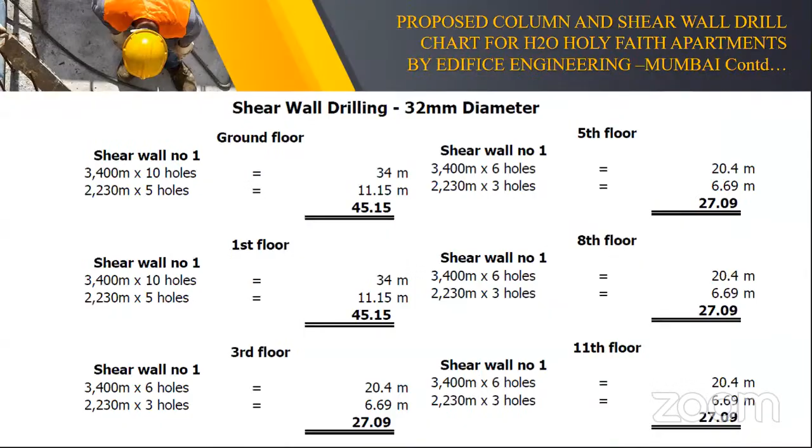So we are presenting a case study, the demolition of apartments at Maradu, Kochi, as part of this presentation. Let me run through, as the time is a bit short.

Demolition can be defined as dismantling, razing, destroying, or wrecking any building or structure or any part thereof in a pre-planned and controlled manner. Whenever a structure is to be demolished, it must be seen that the method adopted takes minimum duration, produces less noise, causes no pollution beyond permissible limits, does not disturb the activity or living in the neighborhood, and is economically viable.

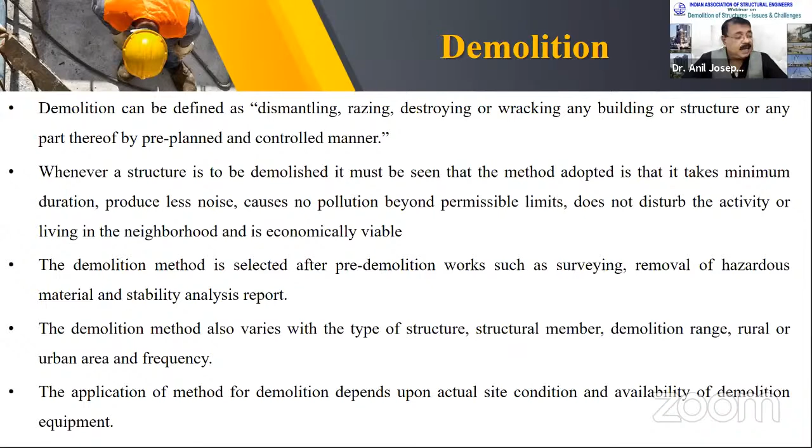The demolition method is selected after pre-demolition works such as surveying, removal of hazardous material, and stability analysis reports. Demolition method also varies with the type of structure, structural member, demolition range, rural or urban area, and frequency. The application of method for demolition depends upon actual site condition and availability of demolition equipment.

So there are principally three types of structure demolition. One is progressive demolition, second is the mechanism of controlled demolition, and third is the top-down system.

The heavy machinery or equipment includes large motorized vehicles such as bulldozers with rakes, backhoes, hydraulic excavators, and other similar machinery. Cranes equipped with wrecking ball, clamshell, or bucket are also considered heavy machinery.

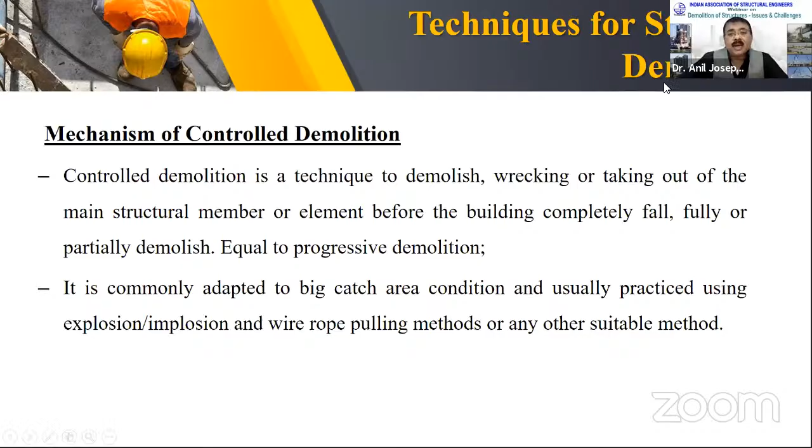In the mechanism of controlled demolition, it's a technique to demolish by wrecking or taking out the main structural member or element before the building completely falls, fully or partially demolished, similar to progressive demolition. It is commonly adopted for big catch area conditions and usually practiced using explosion or implosion and wire rope pulling methods or any other suitable methods.

Deconstruction or top-down method is the technique that proceeds from the roof to ground in a general trend. There is a particular sequence of demolition which may vary depending on site condition and structural elements to be demolished. It is the process of dismantling a building in order to salvage the structural members for material reuse and recovery, commonly practiced using machinery and hand demolition methods. Top-down method is applicable for most sites, particularly for those situated in busy urban areas.

And coming to our topic of discussion today, demolition of buildings by implosion. Implosion or explosive deconstruction is an effective and efficient method of deconstruction and can reduce both cost and time to bring dangerous multi-story structures to ground in comparison to conventional demolition methods.

Implosion is the strategic placing of explosive material and timing of its detonation so that a structure collapses on itself in a matter of seconds, minimizing the physical damages to its immediate surroundings. The technique weakens or removes critical supports so that the building can no longer withstand the force of gravity and it falls under its own weight.

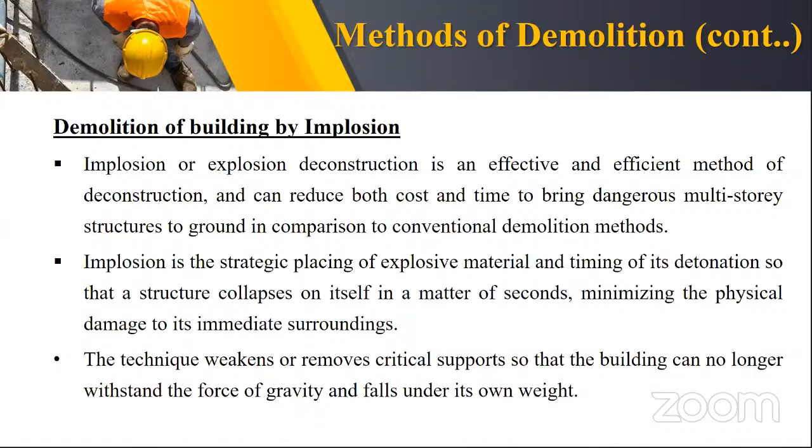So before we go for the blast, there are many considerations which we have to look into. The design may include pre-weakening of the structure, the strategy in placement of the explosive, and time delay so that the building will collapse in a safe manner.

The pre-weakening of the structure may include cutting out a portion of the shear walls and other structural elements, removing the non-load bearing walls. A test blast may be conducted to verify the strength of the structural member and to fine-tune the explosive design.

To minimize the dispersion of building debris into adjoining land after implosion, a trench or bund wall shall be installed outside the building to contain the debris unless a basement exists. After filling the explosive, it will be covered with geotextile wrapping and iron mesh wrapping to prevent flying debris from going out and creating havoc. So this is a good design that will cause the structure to fall towards the center of the building.

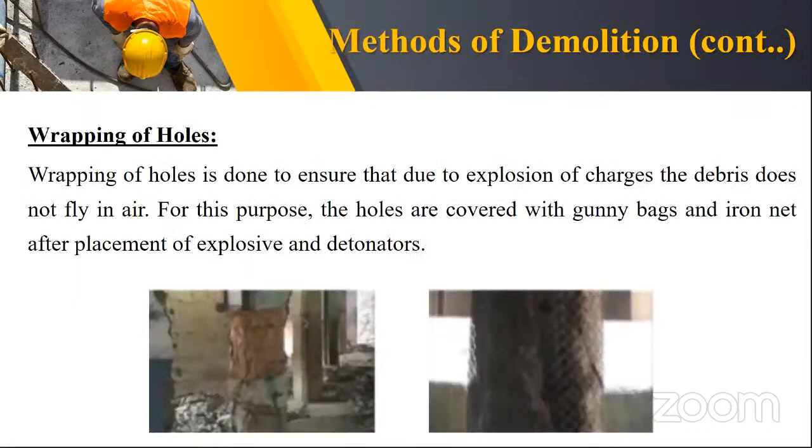Finally, we will go for blasting with the time sequencing so that the building falls in a gradual and planned manner, and the collapse is controlled in such a way that it comes down without affecting the surrounding buildings. So this is the picture presentation of what I talked about now: the conventional top-down method, the wrecking ball method, the hydraulic crusher.

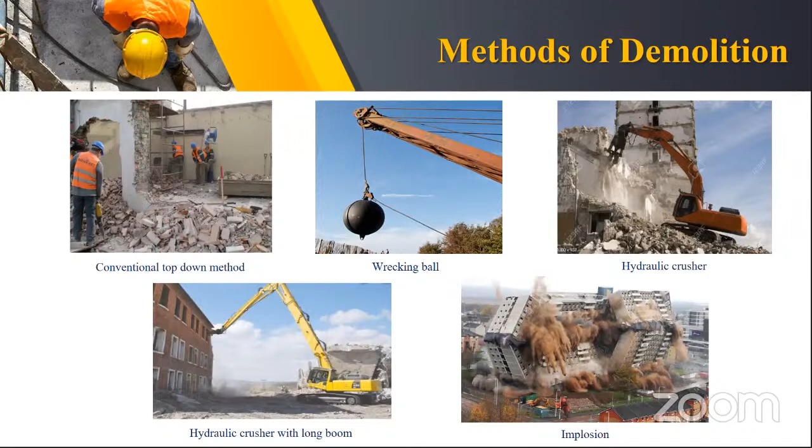Now looking into this, what we do in implosion: use of explosives, protection from noise, debris, and vibration. You need qualified blast heads, good engineering skill between structural engineers, mining engineers, electrical engineers, electronic engineers, and the fire and safety department, and the neighborhood.

So now moving on to the case study for the apartment at Maradu. Maradu is just 7 kilometers from Kochi, and it was formed in '53, and was upgraded to a municipality in 2011.

On September 19, 2006, the Panchayat, without obtaining the mandatory permission from the Kerala Coastal Zone Management Authority, issued building permits to the builders. So builders started constructing the building, and the piling works was carried out.

The building was coming up, and suddenly the Coastal Zone Management Authorities realized that this was not legal, that permission was not obtained. They went and put a stay on the building. But owners approached the court, and the court gave them permission to continue.

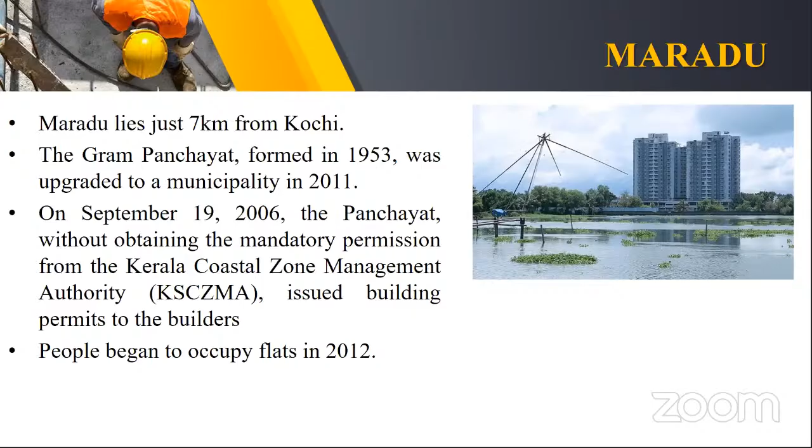And this is the court order: the Supreme Court order on May 8, 2019, when Justice Arun Mishra and Navin Sinha said the permission granted by the Panchayat was illegal and void, and no such development activity could have taken place. In view of the findings of the inquiry committee, let all the structures be removed forthwith within a period of 1 month from May 8, 2019, and compliance be reported to court.

On September 6th, the Supreme Court issued another direction that the state government demolish the apartment before 12th February 2020, and remove all the debris and clear the site.

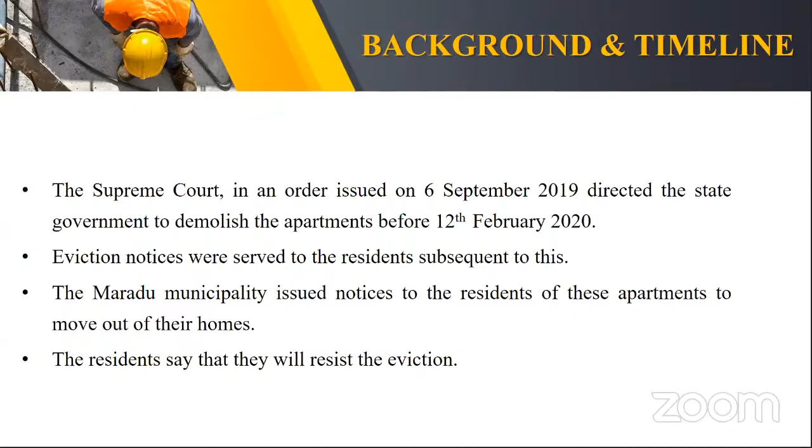So eviction notice was served to the residents subsequent to this. The municipality issued notices to the residents of this apartment to move out of their homes. Residents say that they will resist the eviction, and you can see that the Supreme Court verdict came as a rude shock to the residents.

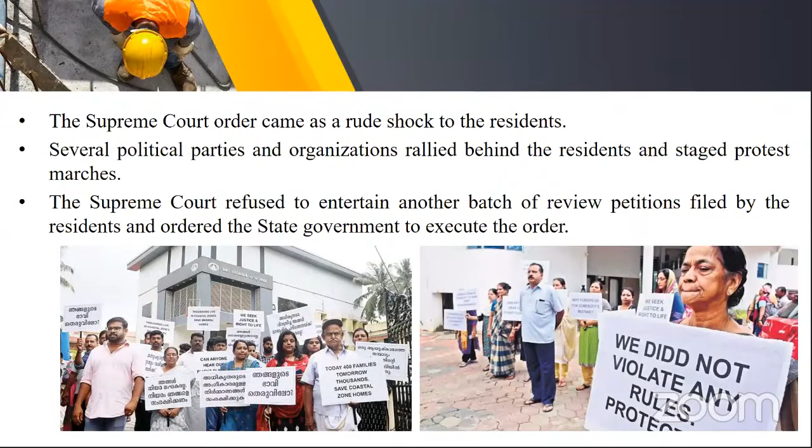Several political parties and organizations rallied behind the residents, and there was a lot of protest. The Supreme Court refused to entertain another batch of review petitions. In fact, there were 17 review petitions filed after I was appointed as the structural engineer to support the government in bringing down the buildings. All 17 appeals were refused by the Supreme Court, and the state government proceeded to execute the work order. So this shows the people who were staying in their homes, in their houses.

Demolition is cruelty to mankind, and they are protesting against the demolition activity of the government. And again, you can see that this was a long-term process. To inform the audience, I was the structural engineer who designed all these buildings other than one, the small building. All the 4 other towers were designed by me as a structural engineer in the year 2006, and the buildings were constructed under my guidance.

Unfortunately, this role was so vague, nobody had a clear-cut idea. And finally, since it was surrounded by so many buildings and the government put so much pressure on me, I had to take up the responsibility for getting the building down also. So I had the dual role of Brahma, the creator, and Shiva, the destructor, in this particular project. And it is quite an emotional thing.

In October, I was still not part of the government team, and I shared my apprehension in the local news channels about the demolition of Maradu flats and raised concern about the safety of the neighborhood. Representing the Association of Structural and Geotechnical Consultants, we had a couple of rounds of meetings with the collector and other office bearers, including the principal secretary. A government order was released appointing me as a member of the technical committee for demolition, representing the Association of Structural and Geotechnical Consultants.

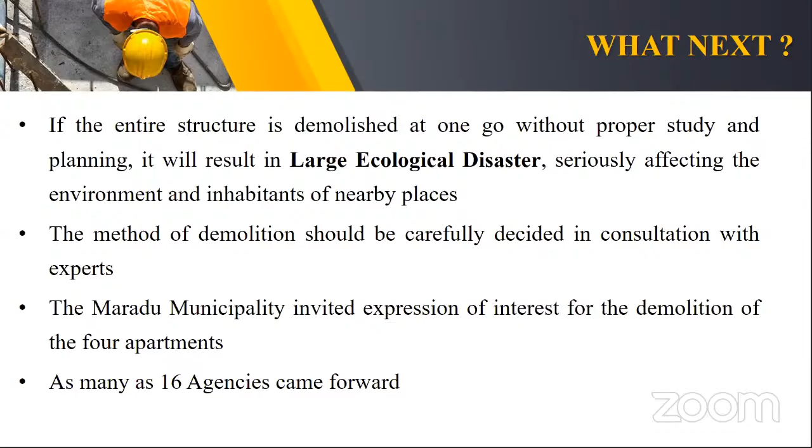We invited expressions of interest for demolition of the 4 apartments, because demolition by implosion was the only practical solution due to the time frame, and 16 agencies came forward. A lot of discussion and deliberation happened, a lot of reviews were conducted, and finally we decided to zero in on Edifice Engineering Mumbai and Vijay Steel from Chennai. And Edifice gave the work to Jet Demolition from South Africa to do the job.

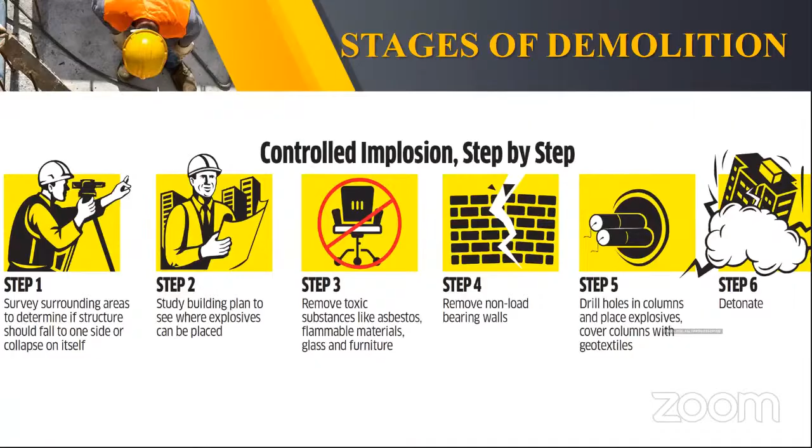The steps for controlled demolition, put in a simple manner: step 1, survey the surrounding area to determine if the structure should fall on one side or collapse on itself. Study the building plan to see where explosives can be placed. Remove toxic substances like asbestos, flammable material, glass and furniture. Remove non-load bearing walls. Drill holes in columns and place explosives. Cover columns with geotextile to prevent flying debris, and go for the detonation.

So now let us get into the challenges in demolition of the apartments. In theory it was very good, but we were studying so many failures that have happened across the world where they have gone for demolition. People have died during the explosion. Even people standing 1 kilometer away had died. There was a case of Canberra Hospital where a girl of 12 years was killed 450 meters away. So we were very apprehensive, and we looked into the challenges in the demolition of these projects.

So you can see the towers here. This is the Alfa Serene Tower 1 and this is the second tower. What are the challenges? Let us look into it. This is the backwater which is running. The problem was that as per coastal zone management, if it is zone 2, they need only a 10 meter setback, and if it is zone 3, they need a 50 meter setback. This building didn't have a 50 meter setback and had to be demolished. All those buildings had the same problem.

So this is the tower, 2 towers, 16 floors, and we have to bring it down. There are 40 odd small houses nearby, a very densely populated area, and another multi-story building of 10 stories next to the flat. The explosion has to be carried out without affecting nearby houses. The plan was to make the apartment collapse into the space between these 2 towers. So this is where we wanted to get it done.

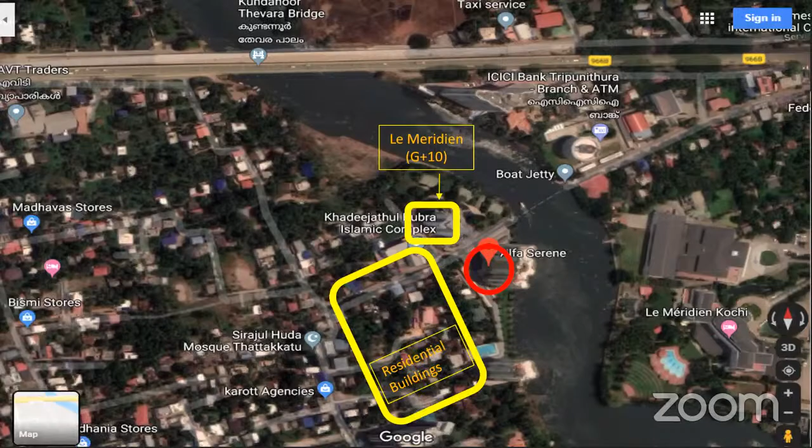If you look in, these are the total residential buildings nearby. Le Méridien had a building; this is the Le Méridien Hotel in Cochin, and their annex complex was just beside this. This is the plan of the structure, I am skipping that. The buildings were luckily founded on piles going up to 45 meters. This is the structural plan. And look at the soil: very sensitive marine clay with SPT value 0 to 2.

So we were afraid of the heaving going to happen due to this impact. Luckily, all the buildings were kept on piles, which have gone up to a depth of 37 to 45 meters, resting in the dense sand strata.

And this is the second project, which is the Jain housing project, which was about 4 lakh square feet for the largest building alone. The flat is surrounded by backwaters and has to be demolished while ensuring the rubble does not fall into the backwater. And if you look at the setback here of this car parking area, it was only 2 meters, and we have to bring it down without getting the spillage into the backwaters. And there are other small buildings also in the area, but fewer houses. The plan was to make the flat collapse towards the eastern side.

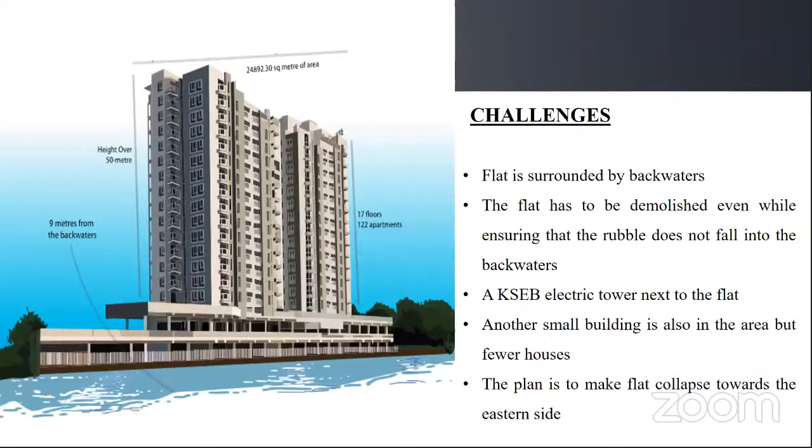So this is the Jain Coral Cove. I'm skipping the structural aspects and the other aspects, which we'll share on another occasion. And this is the Golden Kayaloram building, the smallest of the lot, but the toughest of the lot. There is an Anganwadi located near the flat, just 5 meters away, and a 20-story multi-story apartment 10 meters away. It is feared that debris will fall into the backwaters and the area will be engulfed by dust after demolition.

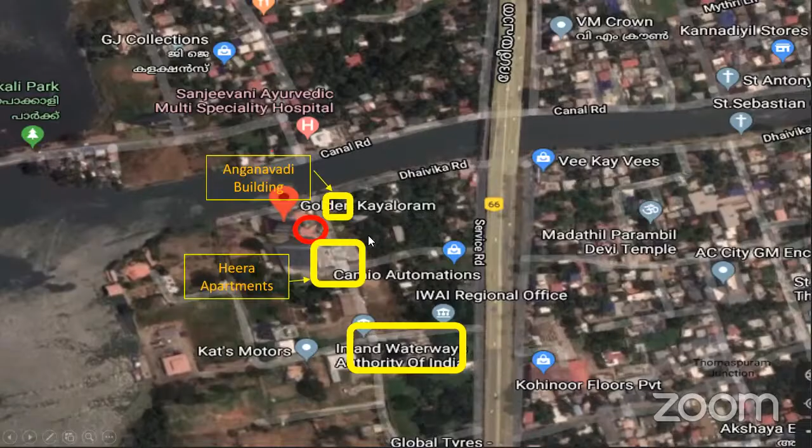The smaller part of the building will be made to collapse towards the Thaikudam bridge and the larger portion towards the opposite side. So we have gone for a split technology here, where we are making one portion of the building fall on one side and the other portion fall onto the other side. So this is the area. You can see that this is the Golden Kayaloram project, and this is the Heera apartment just 10 meters away, a 20-story tower. And this is an Anganwadi building close by, and so many buildings nearby, and we have to bring it down.

So this is the H2O apartment, with a house at a distance of 1.5 meters from the flat. Right next to that is the petrol pump of Bharat Petroleum. The Thevara Kundannoor bridge is at a distance of 10 meters from the front of the flat. Petrol and diesel pipelines of the IOC are also passing underground in front of the flat. And it was so thickly congested. You can see the bridge here. So we had only this small portion where we have to bring the building down at a 36-degree angle on one portion and 47-degree angle on the other portion, without creating damage to the surroundings.

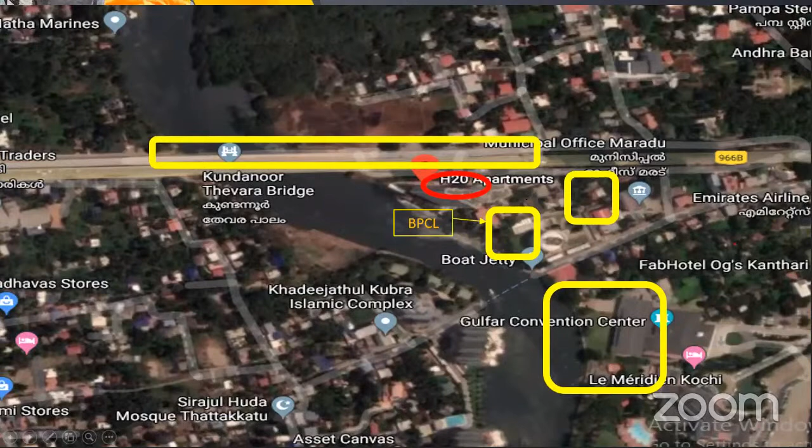So let us look into what we did. So this is the bridge which is running through. This was the apartment. This is the BPCL, and so many petrol pumps and pipelines, oil and gas running across. So it was a big challenge. So this is the plan. And this is the structural framing plan, the shear wall, and all this building was designed and executed by us only. So this is the tower. You can see the bridge very close by, the pipelines running, and high pressure oil pipes pumping oil from the ships to the BPCL refinery in Cochin. All those pipes are running through this. It was a major challenge for us to solve those issues.

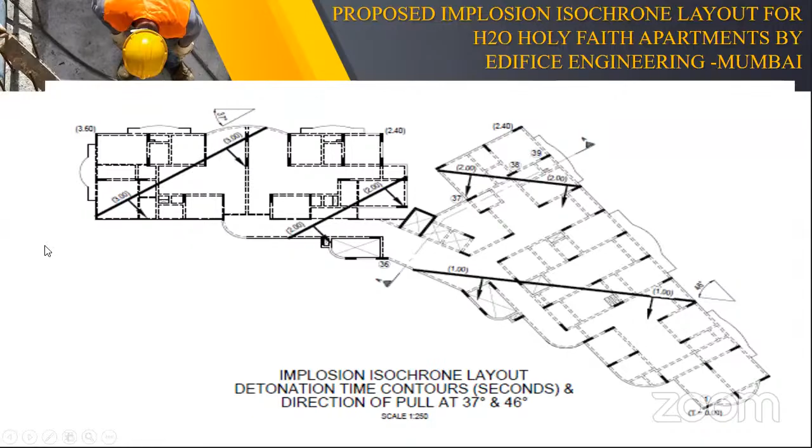So this is the plan. Finally, we did a lot of homework, a lot of design and debate, thanks to the wonderful team of Jet Demolition from South Africa, headed by Joe Brinkmann. We had a lot of discussion, hands-on calculations, and finally we decided to bring it down. And these are the different lines where we are planning to do the blasting; what load is going to hit the ground and how we are going to control it was all worked out on paper. These are the primary blast floors. These are the secondary blast walls where we will be blasting the shear wall. And the sequence of the blasting was also planned.

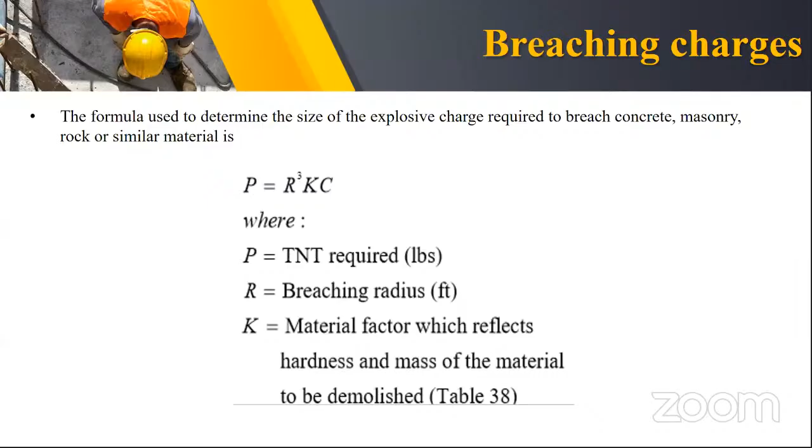And these were the equations which we calculated. So there was a wonderful team comprising of the explosive department, pollution control board, and engineering team to work out how to go about with that. We were all vetting their calculation. And this is the basic equation where we worked out what is the breaching load required and how the hole is to be drilled. I have just put one case and how much the depth has to go,

how to put the blast, what should be the drilling summary, how we will place the wire mesh and geotextile, what should be the distance, how to drill the holes, what sort of explosive is needed, how much explosive is needed, and how we will control the delay.

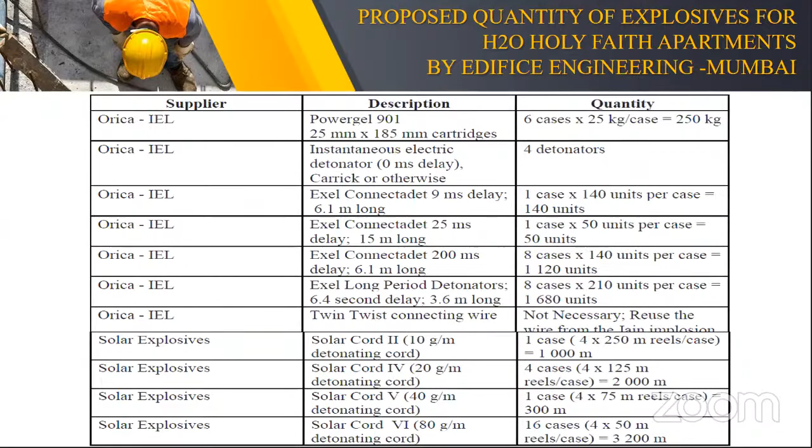So if you look in here, this is 9 millisecond delay. This is 25 millisecond delay. This is the long delay, 200 millisecond delay. And again, this is a 6.4 second delay. Now we are moving from one phase of the building to the other phase of the building. And that is why the impact has to come down. Each time we are making the building come down in a gradual manner.

So the buildings surrounding the entire area were assessed. Pre-demolition assessment was done by the Association of Structural and Geotechnical Consultants. All the buildings were mapped before explosion and after explosion to study what exactly has happened. And use only minimum charge weight of explosive to successfully achieve the implosion.

And that is where the trick is. As a structural engineer, we put more steel, it is more safe. But here, if the explosive component is less, there will be failure. Sorry, due to the scarcity of time, I am not able to show you the videos of failures which have happened. And if you put more, it will become an explosion and flying debris will go and it can lead to death of people. Remove all unnecessary structural elements to lighten the structure.

Minimize ground vibration to eliminate damage to adjoining structures, minimize and control the spread of cementitious dust cloud, and designate a design footprint to collapse the structure within and design for a debris pile. So this is the most important challenge, the touchdown vibration. When the building comes and hits the ground, you have to control the load. So we have about 75,000 ton, we removed 30,000 ton, and we sequenced it in such a way that each time the explosion comes, it will be less than 1,000 tons.

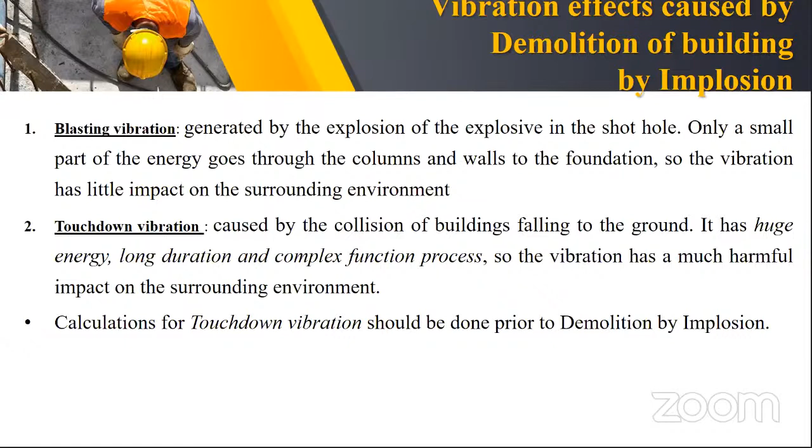So Dr. Joseph, you have 5 minutes more, please.

Yeah. So this is the computing formula for vibration caused by the building. So these are the equations where if the velocity of impact is less than 35 mm per second, there won't be any damage. If it is 55 mm per second, there will be slight cracking. 80 mm per second, there will be cracking. And if it is more than 115 mm, there will be severe cracking.

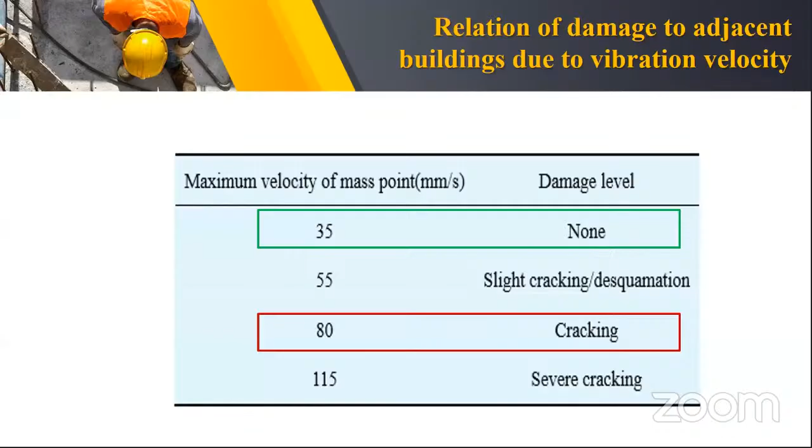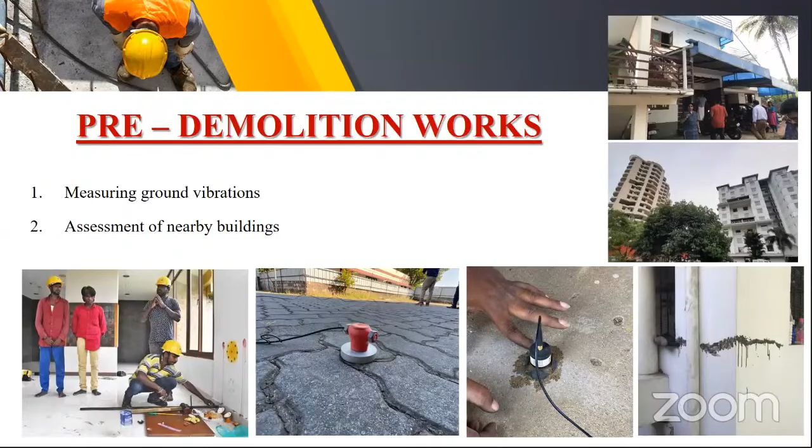This was the team which executed the job. And the first phase involved the planning. And this is Joe Brinkmann of Jet Demolition who was doing that. And the phases were done there. And this is the pre-demolition work. We were measuring the ground and building, assessment of nearby buildings, and you can see that accelerometers and sensors were placed.

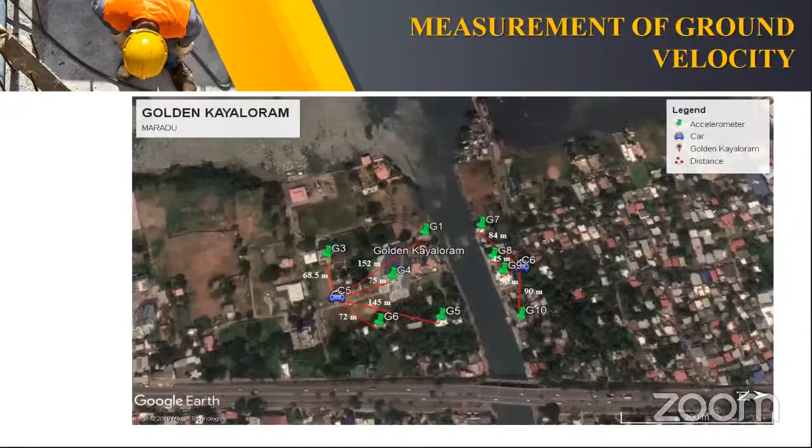So by the time the next fall happens, it will be over. The next building will come; that is the millisecond delays which we are imparting so that the weight hitting the ground is controlled and touchdown vibration can be controlled. So finally, on January 11th and 12th, we brought the buildings down, and this is the buildings before, and you can see the buildings after.

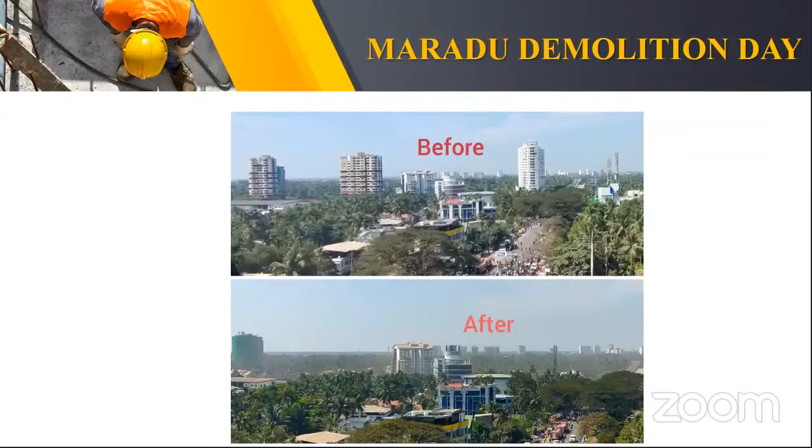And I will just share a couple of videos of exactly what happened. So this is the Holy Faith building which was going down. So we will just skip this and go to this blast. This was one of the most perfect blasts which we had. So this is the 4 lakh square feet Jain.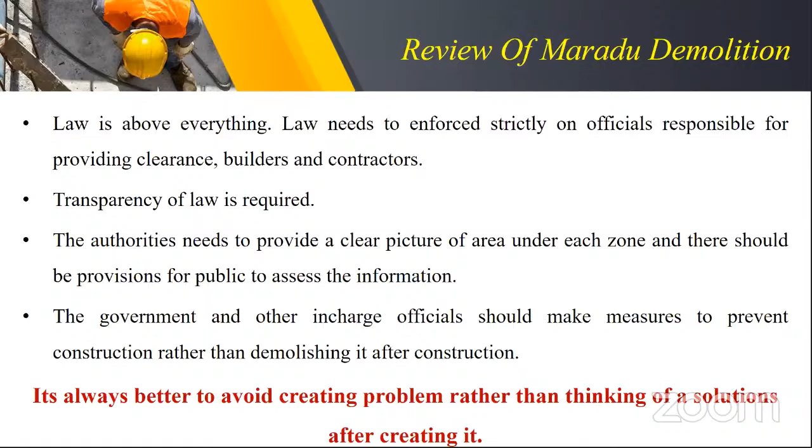Law is above everything. Law needs to be enforced strictly on officials responsible for providing clearance, builders and contractors. Transparency of law is required. Authorities need to provide a clear picture of the area under each zone. And it is always better to avoid creating a problem rather than thinking of a solution after creating it.

The demolished apartments were constructed over a span of 2 to 3 years. It was not done overnight, and people were residing there for 8 years. There are 2 more important factors which we have to consider, the social and economic. As per the study of IIT Madras, the impact was equivalent to removing 8.1 square kilometers of mangroves, and everybody celebrated the demolition, but we never thought once about the families who were left homeless.

There should be a provision to avoid demolition of 29,000 buildings already constructed in these zones by charging a penalty. It took years to build, but only a few seconds to demolish. Let us learn from our mistakes. And this was the before and after.

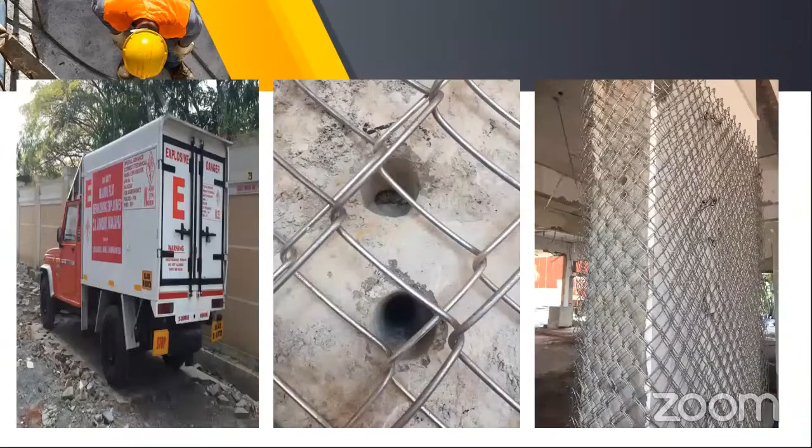Some of the photos. This is the IIT team which was there. I'll just skip through the last minute with some photos. This is the structural engineering team who did the job. And this is how we did the activity, the protection work. This is along with the entire administration team who did the job. And finally, this was what it was before and after. Thank you very much. And I think I am able to finish on time.

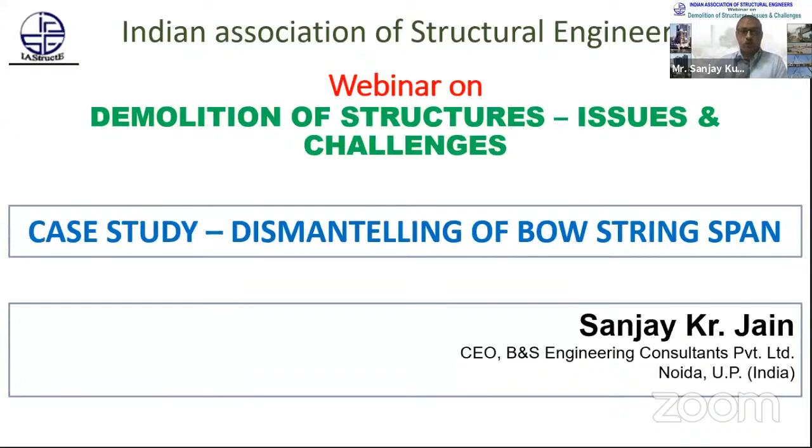I'm going to present on this interesting topic of the demolition of a structure. It is a case study, which is the demolition of a bowstring bridge, which is basically a railway overbridge. Why demolish a bridge? That is the first question, and there could be so many answers.

The first answer could be that the structure is old and has completed its service life, or it may be a functionally inadequate structure. The width, the loading or the vertical clearance required is modified after the construction of the structure. There could be a condition where the structure is unsafe. It is designed with a defective construction material, or there is a change in the loading pattern of the bridge for which it is designed, and there could be a hindrance to further development, like FOBs or ROBs, etc.

Sometimes they planned with a different planning, and then later on, after 50 years or so, the requirement of that particular area is modified, so the bridge is creating a hindrance for further development. So these are the conditions, and there may be a few more conditions in which a bridge may require demolition.

Some of the challenges faced during the dismantling. The first one is the safety of the bridge itself during the dismantling, that it should not fall off in an unintended manner and damage the structures adjacent to this particular structure. The second could be the safety of the personnel involved in the demolition and the equipment. Everything should be protected very well so that there is no damage to person, life or property.

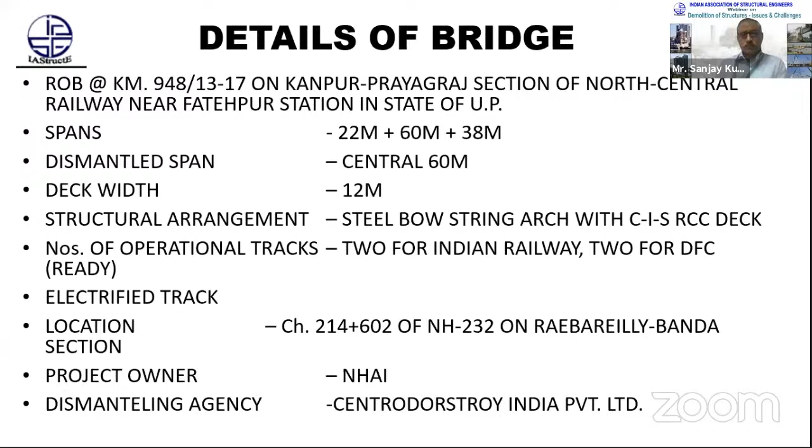The project was owned by the National Highway Authority of India, NHAI, and the dismantling agency involved was Centrodorstroy India Private Limited. The dismantling consultancy services were provided by B&S Engineering Consultants in association with BM Associates. The scheme was finally accepted and approved by North Central Railway, the owner of the utility service, and of course by the National Highway Authority of India.

The maximum weight of an element lifted here was 95 tons. The total weight of the deck slab to be removed was 360 tons, and the weight of the structural steel bowstring arch was 235 metric tons. Two 500 ton capacity cranes were deployed for movement of the main elements, and there was a small crane for doing small lightweight activities.

The distress to the ROB was noticed in June 2019, and the dismantling was completed in January 2021, just 6 months back. The total time taken on site was only 8 days. The rest of the 1.5 years was delay due to administrative reasons and preparation of the schemes, planning and approval from various agencies: the proof consultant, then railways, and then CRS sanction. All these things took time to the tune of 1.5 years.

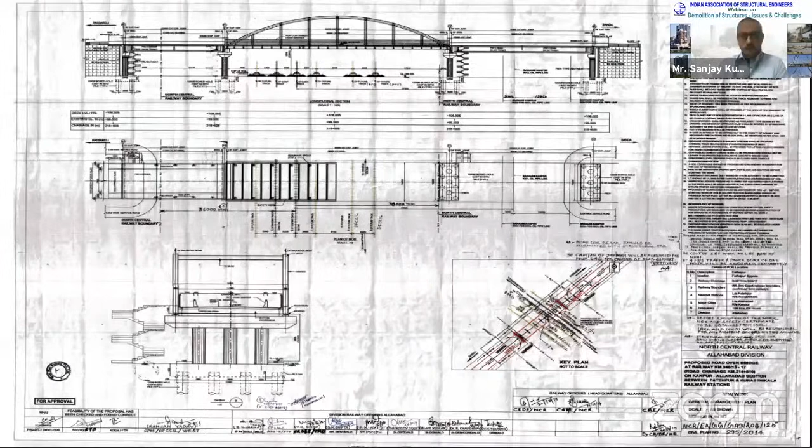This is the general arrangement drawing by which this bridge was constructed. The central span was 60 meters, with 2 side spans in concrete. This was the GAD approved by the railway, and based on which the bridge was constructed.

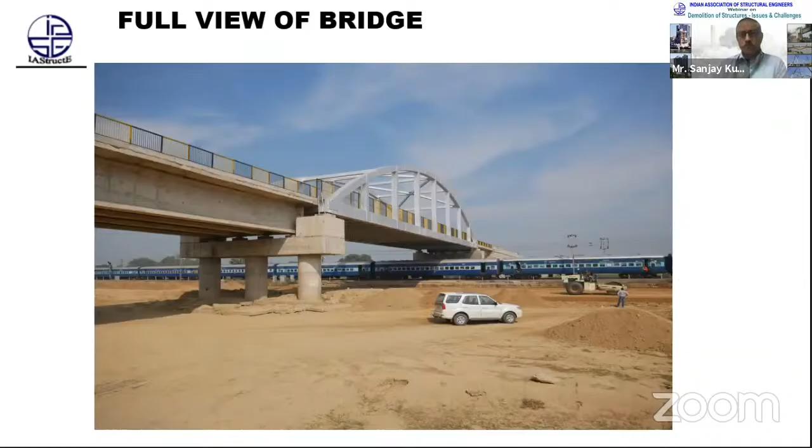Immediately on noticing the distress in the bridge, immediate action was taken by the National Highway Authority of India through the EPC contractor to support the underside of the bridge by providing cribs so that no untoward incident happened. The cribs were deployed at site, and the bridge was made safe so that it doesn't cause any catastrophic collapse.

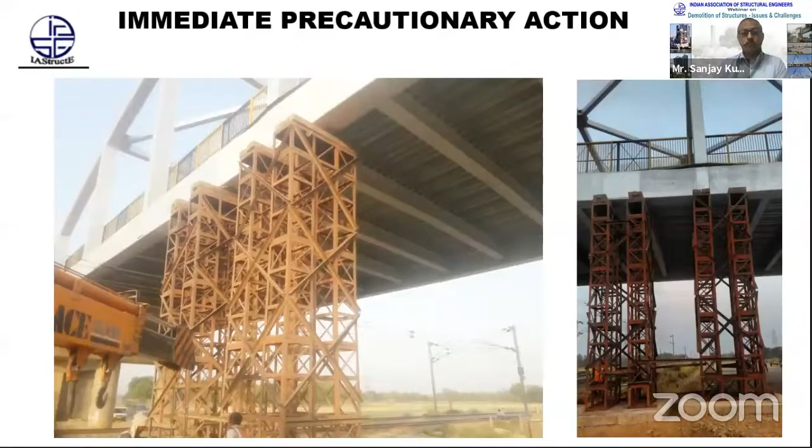Some preparatory works were taken care of before the dismantling: the entire site of the bridge was barricaded against trespassing by any living being, human or animal, and the area was cleared of infringements for stacking material or temporary arrangements, since there wasn't enough space for the movement of the crane. So the bridge deck of the adjacent spans was cleared for storage of the dismantled material.

The tracks were protected as per the rules of the Indian Railway P-Way manual. Before starting any dismantling activity, CRS sanction was obtained for the dismantling as well as erection of the temporary structure near or over the adjoining railway tracks. As per the SOD, a 3.5 meter clearance from the railway track was maintained, though the requirement is 2.5 meter for stationary objects. But as an abundant precaution, it was decided to keep 3.5 meter clearance even from stationary objects. All activities over and around the tracks were performed under the traffic and power block of railway, since it's an electrified track.

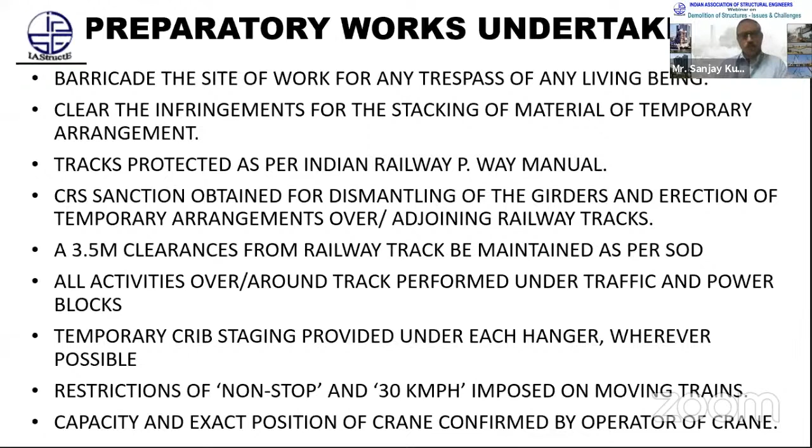First, the crash barrier, hand railing, and footpath were removed without requiring any traffic or power block. It was decided that in case of excessive wind speed of more than 30 kmph, no critical lifting activity of any part of the bridge would be undertaken, because there may be unprecedented movement of the hanging part during that time, which may damage the remaining structure.

Strengthening of the damaged location of the structural steel was done, so that the members are able to take the load considered during the dismantling.

The railing and crash barrier of the minimum 30-meter length of the approach span on either side were removed, creating a platform for supporting the dismantled portion of the deck slab. Stools were placed at predetermined locations so that loading on the existing bridge is placed only at the designated place, for the safety of adjacent spans which were not to be demolished.

The deck slab was cut at designated locations as per the drawings to allow removal. Cutting was done by a concrete saw cutting machine—though a wire cutting machine was initially planned, saw cutting was finally adopted for both concrete and steel.

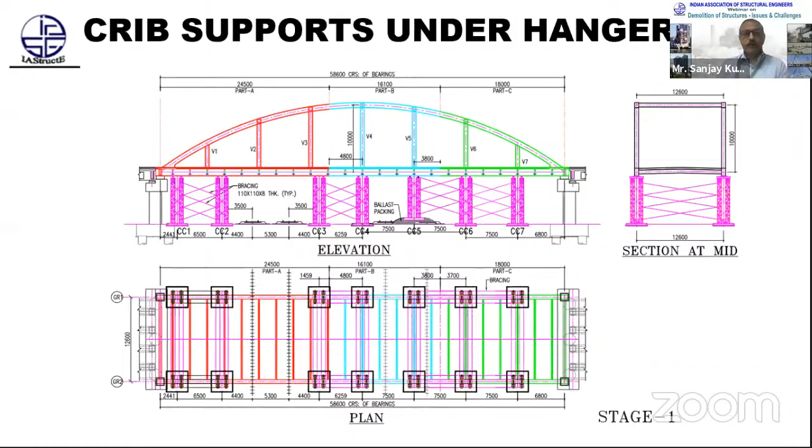The first part to be dismantled was decided by the railway as part B, the central one, then part A, the left one, and then part C, the right one. This was decided by the railway, though we had planned earlier to go first with the portion over the railway tracks so that once that portion is cleared, the problem to the railways is minimized. But railway people insisted on going for part B first, then part A, then part C—this was as per their instructions.

Every element to be demolished was marked with a distinguished number, like external girder, cross girder 1, top bracings, bottom bracing, hangers—every member was given a different nomenclature.

This is the first stage of demolition, the start of the process. First, the crane is placed at the desired location for removal of the upper portion. For removal of the upper portion of the arch and hangers of the central portion, part B, the upper portion of part B is held and the arch of part B is cut along with the hangers at 3 to 4 locations—first here, second here, then the second hanger, and then there.

After cutting the structure at 4 locations, the cross girders and top cross girders were removed first, then cutting of the arch beam and hangers was started so that both the left side girder (GR1) and right side girder (GR2) become independent. They are cut and lifted by the crane, and the upper portion is removed with the help of the crane and kept on the ground, since both GR1 and GR2 are separated after first cutting the cross girders. Both are then placed on the ground and disposed of.

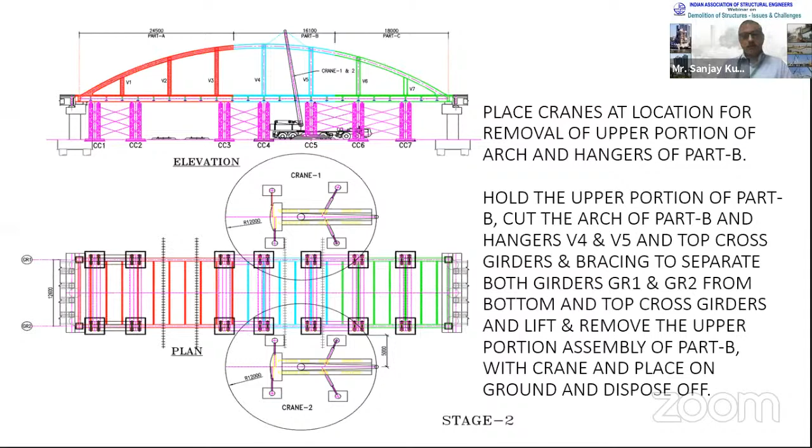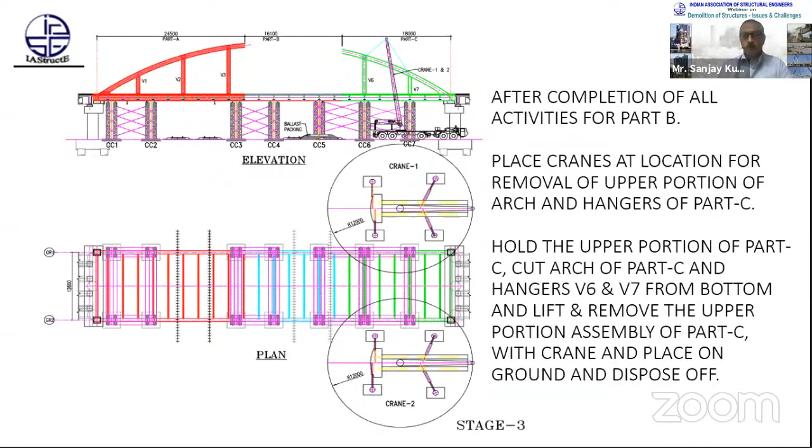The next stage begins after completion of all activities of part B. Now the cranes are placed for removal of part C in a designated manner and location. For removal of the upper portion of the arch and hangers, the upper portion of part C is held, the arch of part C and hangers V6 and V7 are cut from the bottom, and the upper portion assembly of part C is lifted and removed with the help of the crane, placed on the ground, and disposed of.

Then cross the cranes across the railway tracks. There were 2 operational railway tracks. So now the crane has to cross the railway tracks and be brought on the other side, within the traffic and power block of 1 hour, and then place the cranes at the location for removal of the upper portion of the arch and hangers of part A.

Hold the upper portion of part A with cranes. Cut the arch in a similar manner, all 3 hangers and the bottom portion of the arch connected with the bottom cord. All these things have to be cut along with the cross bracings and cross girders, so that both girders get separated from bottom and top, and then remove the part to the ground and dispose.

After complete removal of the upper portion, now only the bottom cord and deck slab along with the cross girder is pending. So place the crane at the designated location for removal of the lower portion having cross girders and RCC deck slab for part A, and provide cross beams, which we call spider beams, under the lifting portion of part A, attached with the crane sling in a balanced manner, so that the CG of the element to be lifted and the crane hook remain at the same location. Lift the deck slab with cross girder of part A near the expansion joint over a 10.25 meter length.

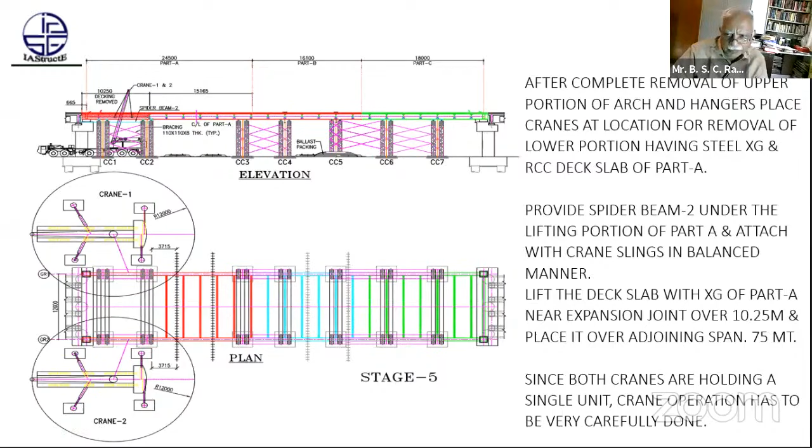After removal of the 10 meter length, for removal of the remaining 15 meter length of part A, place the cranes at the desired location and provide spider beam 1 under part A. One can see the spider beam is visible in green color.

Attach with the crane sling in a balanced manner, matching with the CG. Hold the spider beam 1 placed under part A with cranes, lift and remove the lower portion assembly of part A with the cranes, and place it on the approach span on stools already placed. Dispose of the demolished material and remove the cribs CC1 and CC2, so that this place is now clear of any other activity.

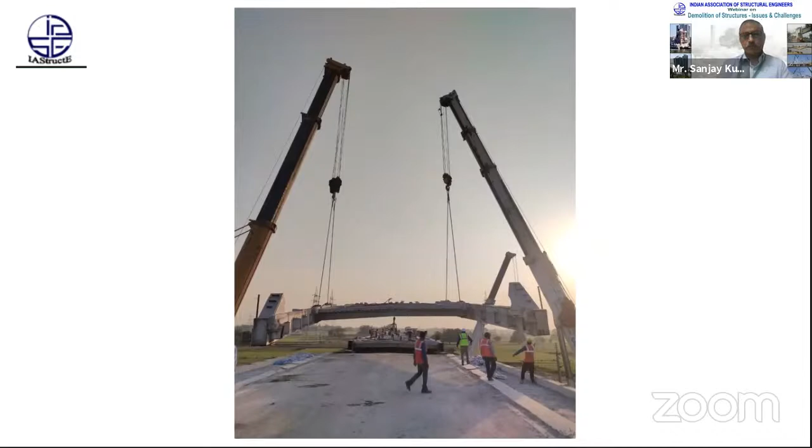Cross cranes across the railway tracks. Earlier we were working on the left portion of the railway tracks. Now the crane has to move back to the right side and cross the tracks with traffic and power block. Place cranes at the location for removal of the deck having bottom beam, cross girders, and the RCC part of the deck slab.

Provide spider beam 1 under the deck slab and attach with the crane sling. Hold the spider beam placed under with the cranes. Lift and remove crib CC3 and CC4. So under this lifted position of element B, crib CC3 and CC4 are removed, and then this element is brought down to the ground itself.

There was no other place to keep this 15 meter long element, and cranes cannot move while lifting this 95 ton block of concrete and steel, so it is brought to the ground and then the material is disposed of.

Then in a similar manner, place the cranes at the location for removal of the deck slab having cross girders and deck slab for part C. Provide spider beam for lifting - again this is a longer section of 20 meters. The 5 meter portion has to be removed first, and then the remaining 15 meter length portion in a similar manner.

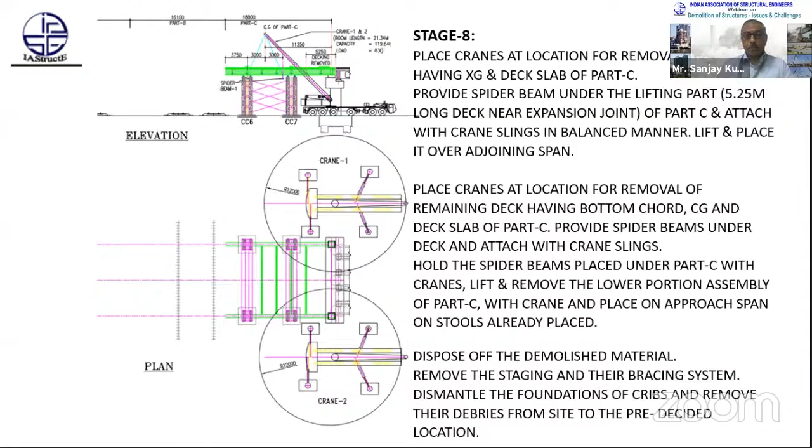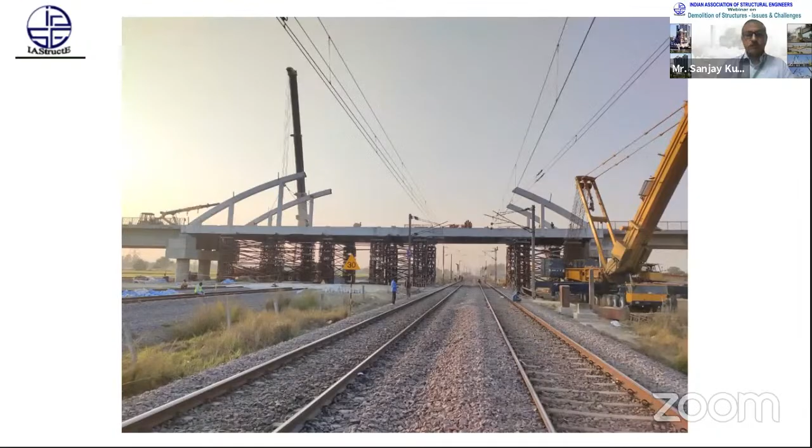And finally, conclusion. Dismantling of a bridge superstructure is much more difficult than its construction, as told by Dr. Anil Joseph, that once who has created a structure, it is very, very difficult for him to demolish it, dismantle it. And intelligent and timely planning is the key to the successful completion of difficult task of demolition of a bridge superstructure. Then adequacy of partly demolished structure must be ensured under every stage

beforehand, so that there is no untoward incident during the dismantling process. And policy of zero tolerance on safety must always be adopted in such an activity. Then all ground personnel must be made aware of the safety issues during this demolition process, what could happen.

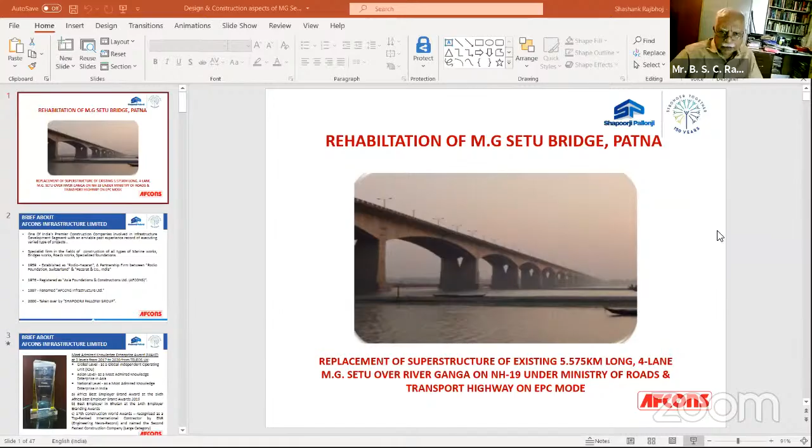In fact, this is a particularly interesting presentation for me personally, because I have traveled on this bridge any number of times from Patna to the other side on my way to Darbhanga and to Madhepura. And it has always been a misery because the bridge superstructure was in such bad shape that in several parts of the bridge, only one lane was operational, and therefore it could take anywhere from 2.5 to 3 hours to just cross the bridge from one side to the other because of the massive traffic jams and the restriction in the lane width.

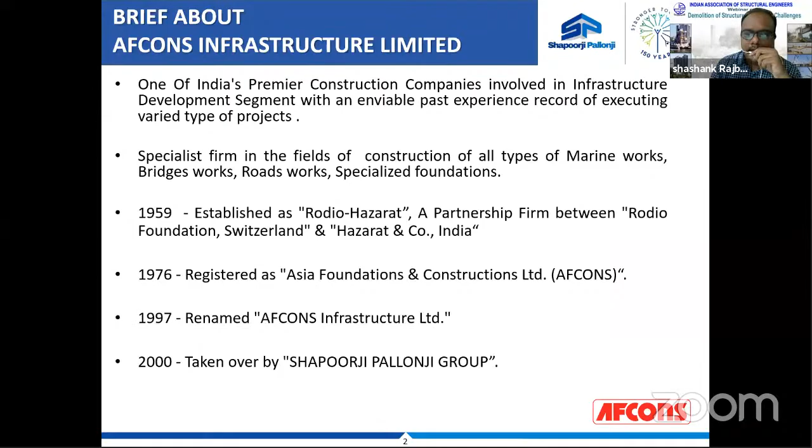So, a brief introduction about my company. Afcons is a premier construction company; it was renamed as Afcons in '97 and taken over by Shapoorji in 2000. Afcons has bagged many international awards: the Best Employer Award in Africa, in Bhutan, and recognized as a top international construction company, larger category.

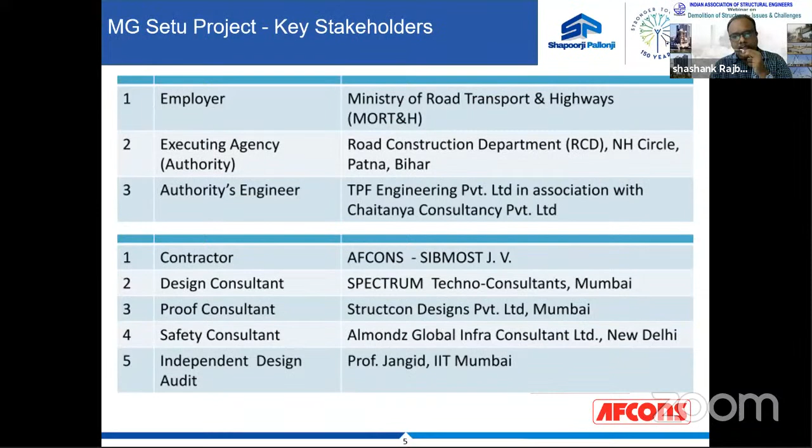So these are the key stakeholders of MG Setu Bridge. Employer is MORTH, Ministry of Road Transport and Highways; Executing Agency is RCD, Patna, Bihar; Authority's Engineer is TPF in association with Chaitanya. Contractor is Afcons SIBMOST JV, design consultant Spectrum, proof consultant Structcon, safety consultants Almondz, and independent design audit was done by Professor Jangid.

Now, these are some of the very challenging issues faced during the deconstruction of this superstructure for MG Setu Bridge, challenges in construction as well as in design. These are the basic topics that we are going to cover in this presentation. Design check for substructures during the construction stages when the superstructure is being dismantled; the substructures were checked for different construction stages. The design check for the balanced cantilever bridge during dismantling, and then the erection of steel superstructure, and the substructures and foundations were checked for the new superstructure load. Design of erection systems for the new superstructure, that is steel truss on land and waterway spans.

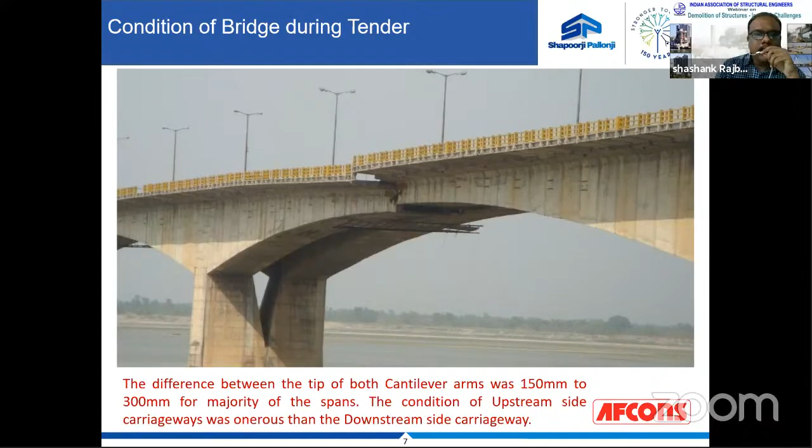So this was the condition of the bridge when we got the tender. The two arms of the balanced cantilever had a substantial difference of 150 mm to 300 mm. This is the upstream side of the bridge from Patna to Hajipur side, and the vehicles moving on this were literally flying onto the other arm of the balanced cantilever, causing a lot of stresses and fatigue. So this bridge definitely had to be brought down because there were safety issues involved. One span was already dismantled on the upstream side when the tender was awarded to us.

There were external cables placed inside these box girders of the superstructure because the authorities tried to bring the deflections back to their original shape by providing these external pre-stressing cables. There were a lot of external pre-stressing cables, so during dismantling, this also had to be taken care of.

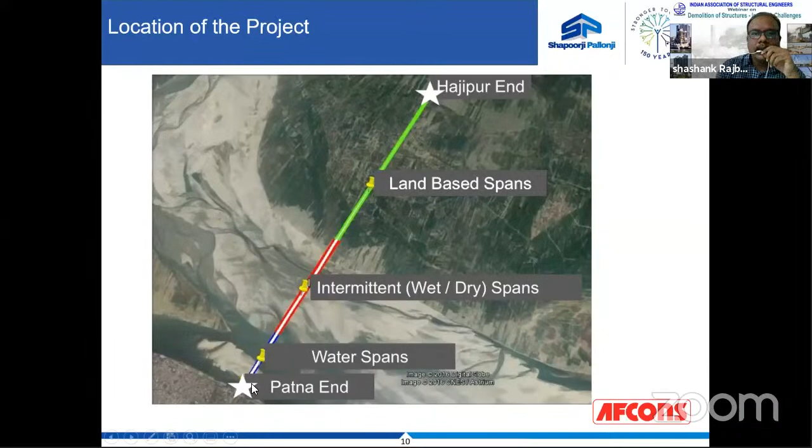So this was the total scope of the project from Patna side to Hajipur side. There were land-based spans and intermittent spans; these were either wet or dry, having a little water. And then there were perennial water spans, which had deep water. And this is on the Patna side. Each span was 117 meters long. This was 5.5 kilometers from Patna to Hajipur. We divided this bridge into three types: dry spans, dry-wet or intermittent spans, and wet spans. The dry spans were 26 in each carriageway, so two carriageways become 52. Then dry-wet spans were 10 on the upstream side, and wet spans were 10. So these were the general arrangements that we segregated for the dismantling of this Patna bridge.

We'll talk about the construction stages that we established for the dismantling of this bridge. So these were the two carriageways: the upstream side carriageway and the downstream side carriageway. This was the condition of the bridge before the start of the project. Then we dismantled the upstream side first because the traffic was still moving, so all the traffic was diverted towards the downstream side. The total upstream superstructure was dismantled down to a certain level. Then we had to construct a new pier cap. The protruding bars inside these piers were exposed for the development length, and then the new pier cap was cast.

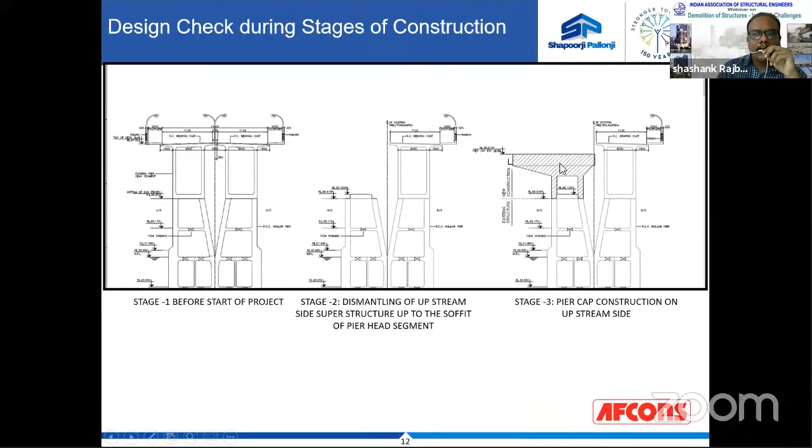And then we started constructing. We wanted to construct a superstructure on the upstream side. If you see the previous slide, the total superstructures were concentric to the pier. But when the new superstructure was going to be constructed, it was very eccentric.

So when we calculated, the inner face of the piers were giving very high tensile stresses, and the crack widths were more than permissible limits. So we tied these two piers together with the stressing bars to bring back the stress levels to the desired level before constructing this superstructure. So after doing this, we constructed a superstructure on the top of the upstream side.

And when this is completed and commissioned, this is the current stage, then we dismantle the downstream side. So the downstream side has been dismantled now, and traffic is moving on the upstream side. And new pier caps are being built over here.

And after building the new pier cap, these two pier caps were tied together, or rather the development bars of the upstream sides were embedded inside the downstream side, and this forms a portal action. And then we remove these temporary pre-stressing cables, and then we construct the downstream side. So this was the general deconstruction and construction sequence of rehabilitation of MG Setu Bridge.

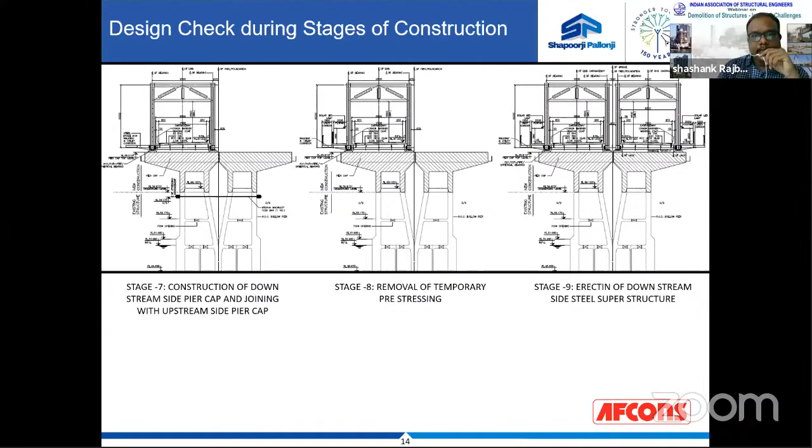And during dismantling, there were safety platforms laid all around the pier cap for walking of the people, then stressing, then chipping of the concrete piers to protrude the development rebars, tying of the reinforcement, arrangement for formwork, casting of the new pier cap, and also tying and stressing of the Macalloy bars that we have discussed.

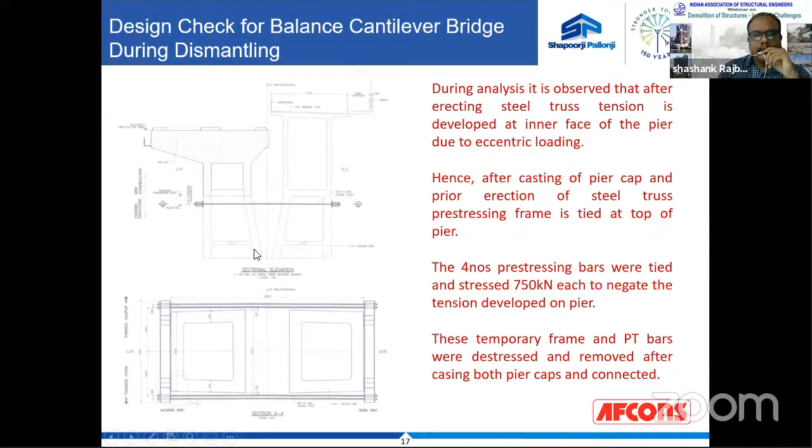This was the construction of the pier cap on a ground supported arrangement, the conventional method of casting the pier cap. And as I discussed, 4 pre-stressing bars of 750 kilonewton each, that is 75 ton each. These were tied together to keep the stresses of the inner face of the pier within the limits.

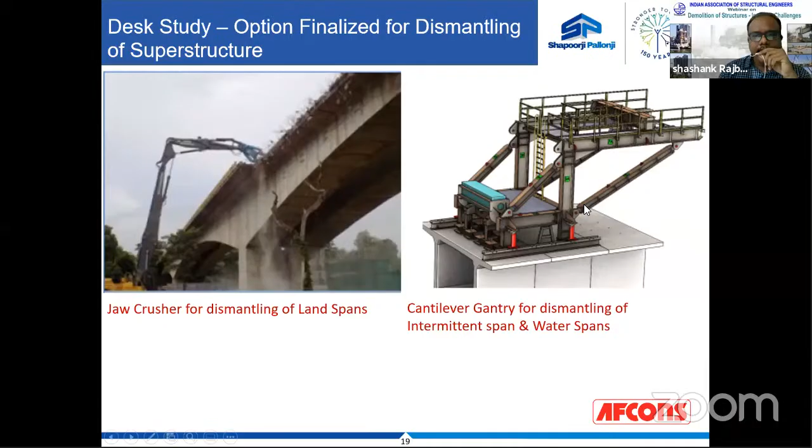What we did is for the land span, we used jaw crushers, and for the cantilever span in water, we used cantilever gantries. These were small gantries, hardly 35 metric tons as against the 1600 metric tons assessed in the tender. So 1 gantry was 30 to 35 metric tons, and 2 gantries were 70 tons. We produced 4 sets on the site, and it was still much lower than the tender proposal.

So this we assessed with a very simple formula, P by A and M by Z. To limit the negative stresses on the top fiber of the superstructure, we reduced the SIDL footpath loads before actually dismantling the superstructure. We first removed the SIDL load, footpath, and crash barriers. We also removed the wearing coat by excavators from the top of the superstructure.

We also removed all utilities and cable troughs with the help of cranes. So this was reducing all the loads from the superstructure, and the tensile stresses were limited. So this was the P by A, M by Z calculation we did. We saw that for all stages, there are no tensile stresses developed at the top fiber of the cantilever arms of the superstructure.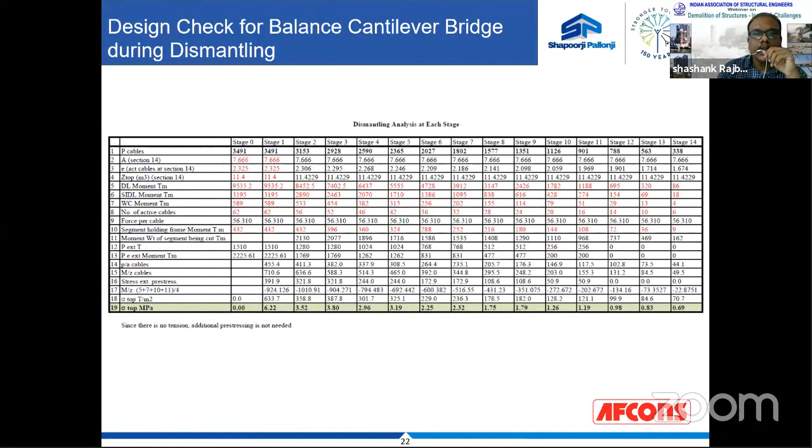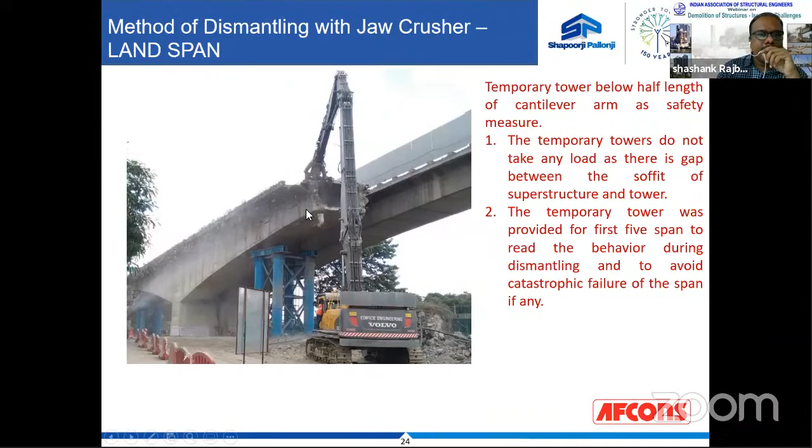Okay, so the jaw crusher was a very fast dismantling object, and the jaw crushing of the superstructure was very effective, and we achieved around 6 spans in a month. This we consider as 1 span. These are the photographs of the jaw crusher, and as I've already told, these were the temporary towers, and it was not touching the soffit of the superstructure. This tower was having some gap, and we just kept it for safety purposes, because we really didn't know how the dismantling behavior would take place.

On the water spans, what we did is we assembled cantilever construction gantries. As I've told you, each gantry weighed only 30 metric tons. The rear leg of the gantry was tied to the previous segment and anchored properly. And even some kentledges were laid so that the factor against overturning moment was greater than 2. And this was 30 metric tons, and this was designed to carry a load of 80 metric ton segments. So these segments were cut in 3 meter lengths, and we found out that it should be less than 80 metric tons. We calculated the weight of the segments, and these were moving symmetrically, cutting the segments and moving behind.

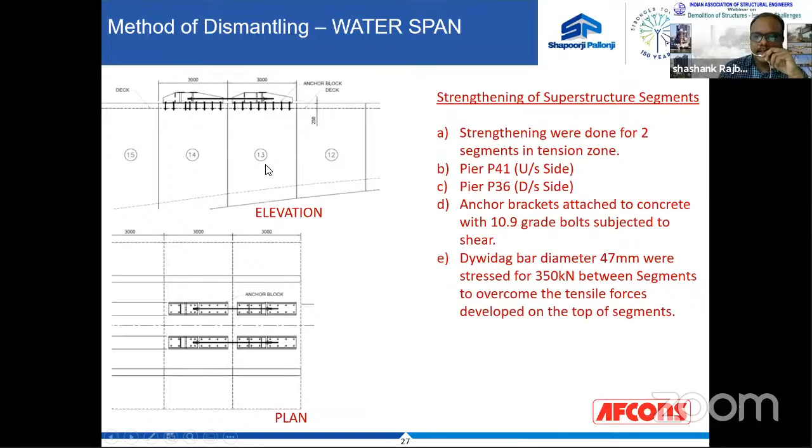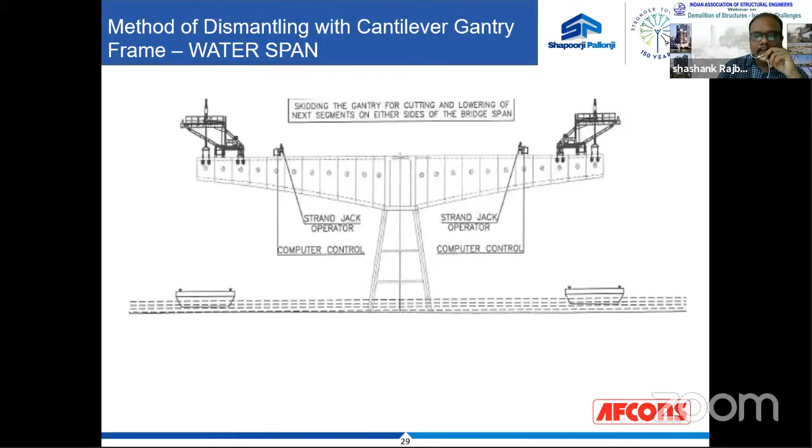Now we marked the segments, and the segments which were very big, which were crossing 80 metric tons for the 3 meter length, we cut into half. I mean, we cut those larger segments in 1.5 meter lengths. So we saw that the weight of the cut segments should not exceed 80 metric tons. That was the capacity of the gantry. So this is on the water-based span.

You can see a barge floating below, and here on the land-based spans, it was lowered on the trailer, or on the ground and then taken over on the trailer. These were basically the intermittent spans, and these were having water sometimes and sometimes dry, but we could not move the jaw crushers here. The jaw crushers were only used for the land-based spans. The intermittent spans and the dry spans were done using the cantilever construction gantries.

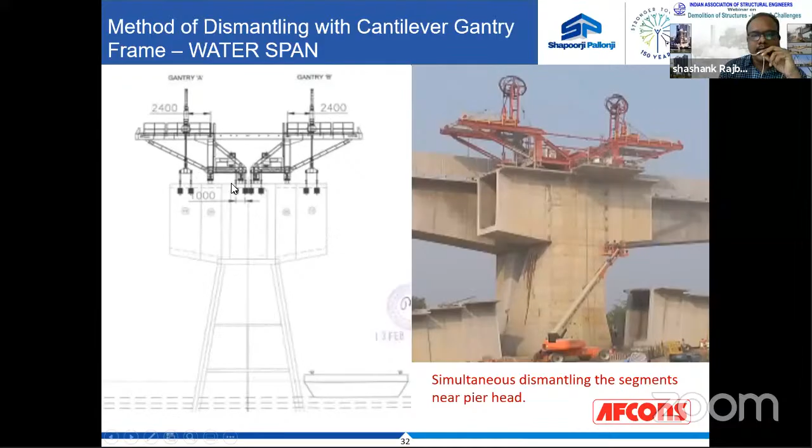So this is the demolition of the spans I have already talked about. But as Mr. Sanjay Kumar Jain has said, demolition of the superstructure is much more difficult than its construction. So the difficult part was over, and then we started the construction of the new superstructure, that is the steel truss. On the land and intermittent spans, we did it with ground supports. For intermittent spans, we did some ground improvement for the crane to move. We did some filling works there. We did some compactions, and the ground supported arrangement of the trusses was done. And we erected a span with the bottom chord first, then the bracings, and then the top chord. So this is the finished truss on the land or intermittent span.

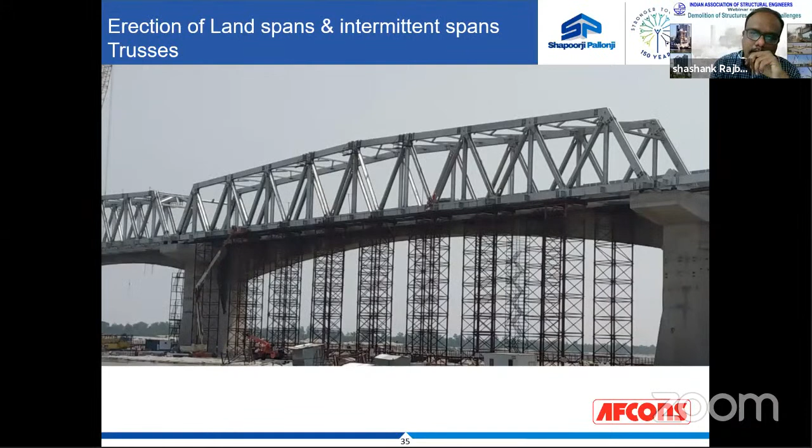As I've already told, you can see here the intermittent spans. There was some water, but we had to fill in, and the river Ganga was very unpredictable. The flow was sometimes very high, and sometimes we used to get good sand, good soil. So that is how it was. For the intermittent spans, some filling and compaction was done to lay these trestles and foundations, and they are precast foundations.

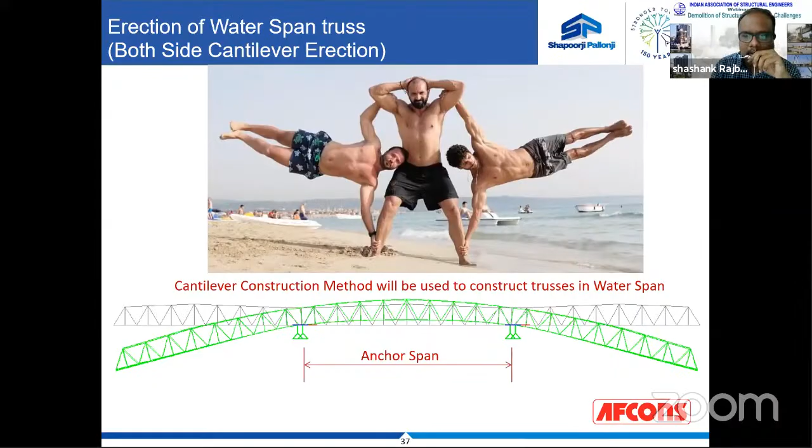Now, cantilever span erection in the water span: we did it with the balanced cantilever method. You can see the top chords get tensile forces, and the bottom, compression. And there was an anchor span in the middle. So this is how the anchor span was done in the water. We drilled these piles up to refusal, and then welding of on-site bracings was done, and then the anchor span was erected here, supporting on the liners which were drilled inside the river bed.

Mr. Rajboj, you have 5 minutes more. Please. Yeah.

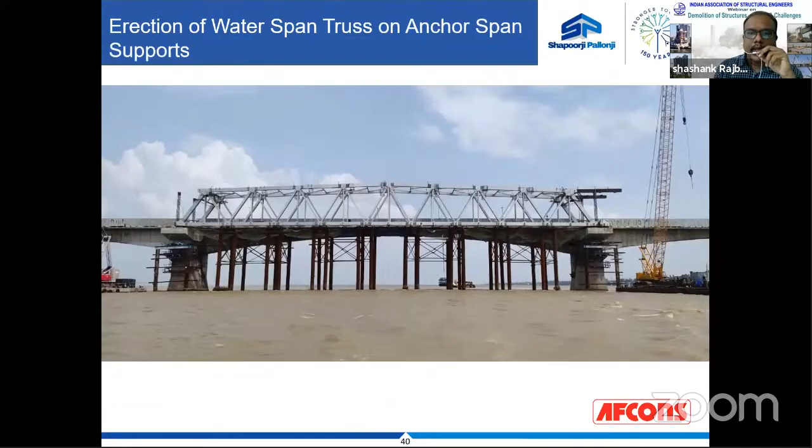So this is how it was done. And then there are the balanced cantilever works which were carried out after the construction of this trestle. The bottom supports were removed. And this is a link member to tie this together during the balanced cantilever. There is a buffer block for taking the compression, at the bottom. This is the anchor span on the left side, and this is the new construction. So the buffer block, and the link at the top to take the tensile forces. And this is how the construction commences. This is the top tensile temporary member, and the construction begins from here on both sides.

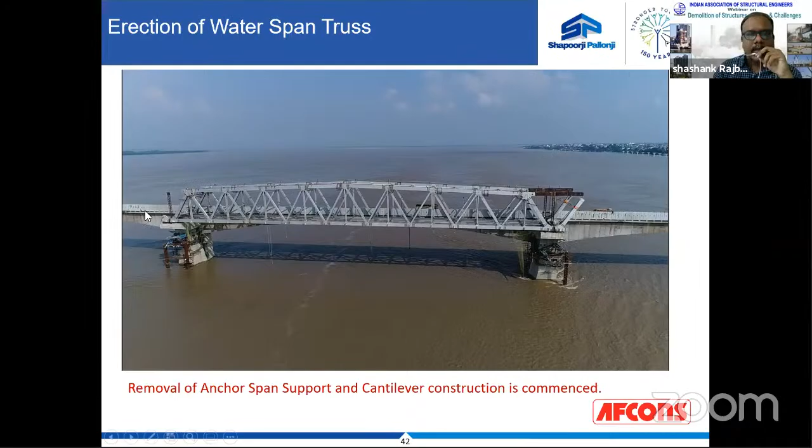This is how it was constructed in water. You can see the crane on the floating barges, feeding one by one segment of steel members. And this is how we constructed the superstructure in the water by the balanced cantilever method. This is the progressive construction photograph. We modelled each construction stage of the balanced cantilever progression in the software, and we were getting values of deflections and camber, which we monitored on site so that it achieves the exact camber.

We saw that this cantilever could span up to 103, 104 meters, but we still had to reach 117 meters. So we placed one temporary support here, because due to wind load it could not span the full 117 meters, as we were developing very heavy stresses at the ends. We supported it up to that point, and the remaining 13 meters were constructed independently.

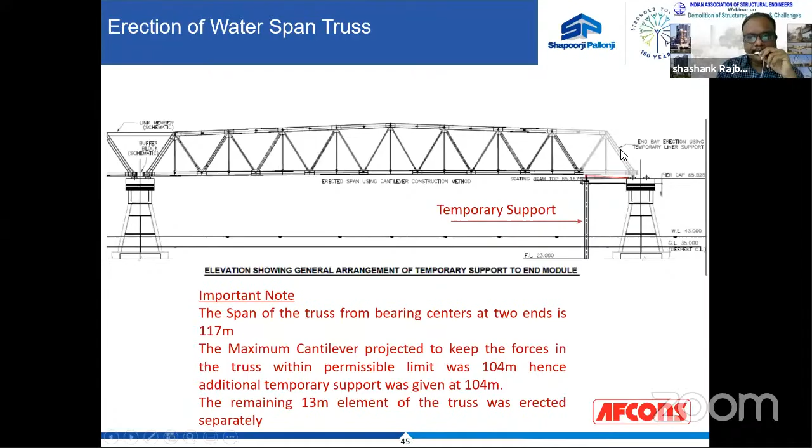So these are photographs of the bridge constructed using the balanced cantilever method. And that is my presentation. I have got one small video that I'd like to share with you, if I can.

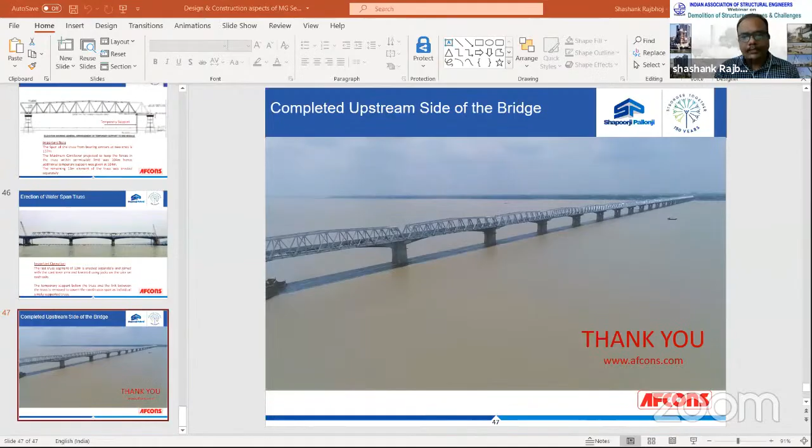Is it visible? Is the video visible? No, the video is not visible, Shashank. Not visible, okay, I'll just... one minute, let me share it. You have to open the video first before sharing it.

I don't know... I'm unable to share this video right now. You still have 1.5 minutes. So possibly I may not be able to share it, because this is around a 10 minute video, so that is the problem.